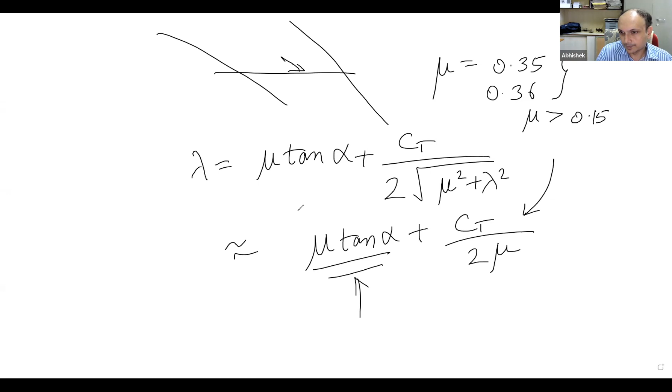Yes sir, and the figure of merit is, we can assume one, right? I know it's defined. No, figure of merit is not even defined for forward flight. Figure of merit is only defined for hovering flight. It has no meaning in forward flight.

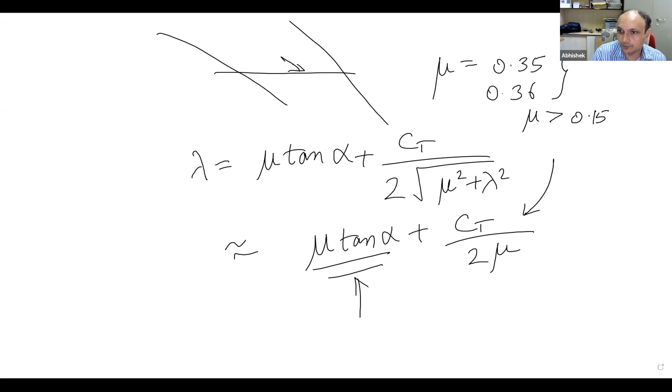And all those calculations by doing everything numerically without requiring to use any formula. You will not be using any formula for anything. All the calculations will be done by numerical integration. So how do we do numerical integration? You will have two options. One is you can do this rectangular method or trapezoidal method, or the other method will be Gaussian quadrature.

Gaussian quadrature, exactly, yes. So we'll do Gaussian quadrature, and I'm going to tell you what is Gaussian quadrature now, because some of you may not be familiar with that. So the main topic now we are going to study is actually applying blade element theory in forward flight, and then deriving the blade flap dynamics equation, and then solving the whole trim problem. So we'll do all that one by one, but before that we need to do this for the next homework assignment, so take down all this carefully.

In Gaussian quadrature, what do we do in this? Gaussian quadrature actually allows you to express any definite integral of this form as a summation series. So a definite continuous integral of this kind is expressed as a series summation. So what is this? This is summation of i equals 1 to m of wi into the function f at xi's. So if m equals 3, this will be w1 f(x1), w2 f(x2), w3 f(x3), etc.

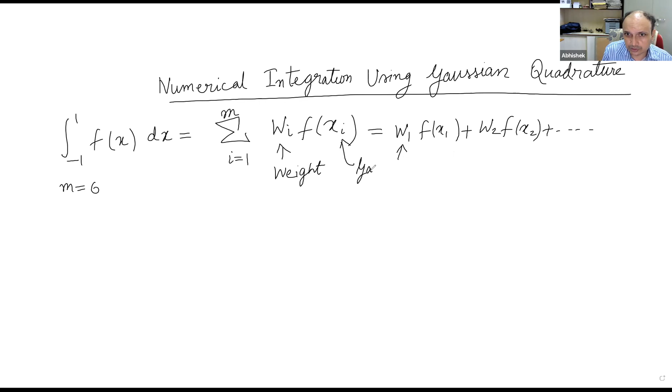So these are actually weights. This wi is actually a weight, like a weightage factor. And xi is, so what is happening now? In the summation series, we are multiplying some weightage factor with the value of the function at xi, or different Gaussian points. This is called a Gaussian point. What are these Gaussian points?

There are nice proper mathematical approaches. If you do any course on numerical analysis or computational methods, you may get a chance to learn about Legendre polynomials and many other things, and Gaussian quadratures also come as one particular thing in that. So one can easily derive these things and find out these weights, but you don't have to do it now. It's already done for you.

So we'll use 6-point Gaussian quadrature. So we'll have 6 xi's and 6 w's. What are these and how do they look like? So x1 and x6 are both going to have the same magnitude but different signs, so it will be minus and plus. Minus sign is for 1 and plus sign is for 6, hence minus plus and not plus minus. The value is 0.932469514.

And you have to note it down up to all these decimal places to ensure accuracy. So 0.932469514. Okay, so these are 2 points. Your x1 will be minus of this, x6 will be plus of this.

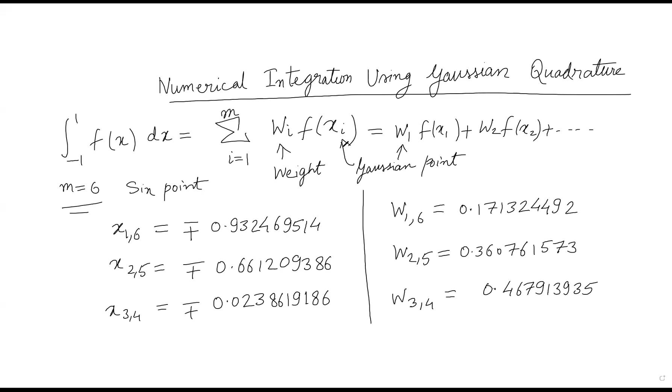Sir, the summation of the weights is approximately 2. Is it okay, sir? Summation of the weights is equal to, I don't care whatever they are - these are what the weights are. Okay, so I'm erasing this. Fine. No resistance, so gone. All right.

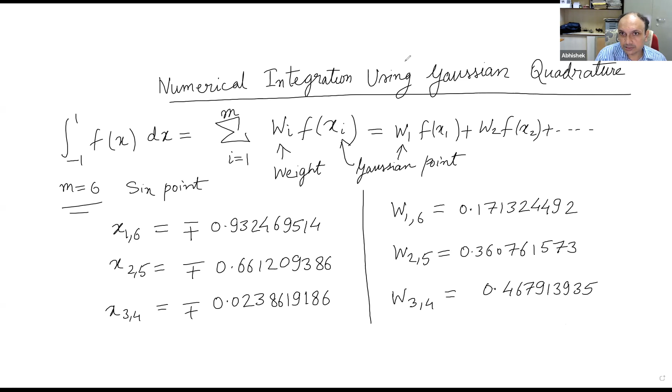But now the problem is that the integral that Gaussian quadrature is helping me solve is this. But I actually want to solve a different integral, right? Which is there for my BEMT. So my BEMT, all my equations go like this: 0 to 1 of dCt equals to 0 to 1.

It could be half sigma CL alpha into theta minus phi into r square dr or something, right? I'm just writing from my memory or something like this. So this becomes my thrust equation. I want to solve this integral, or I want to do the integral for my power, Cp or Cq, whatever. So there is a difference, right? This is a different limit, this is a different limit.

So how do we apply Gaussian quadrature formula for this guy? What do we do?

So this is dCt. If you look at the expression for dCt integration, it is like an even function, so we can divide it by 2 and put the -1 to 1. I cannot rely on that completely - it may not be an even function because CL alpha is also not constant, and this is a complicated function. R square dr - r square dr is fine.

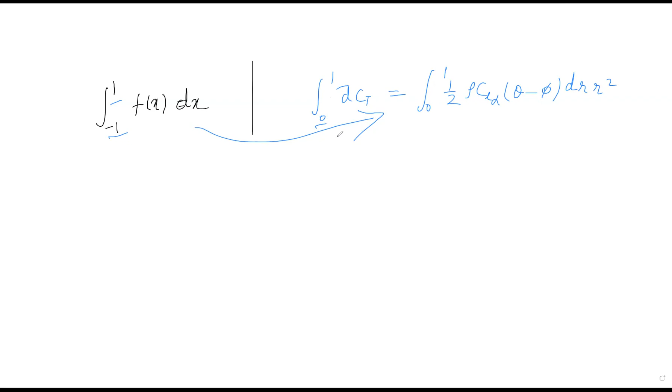I don't think you can say that 0 to 1 is actually, I mean, 0 to half will be same as half to 1. No, sir, I'm not saying that. Sir, in integration, we have a rule that if -1 to 1 integration f of x dx, if f of x is an even function, then we can take 2 into 0 to 1 f of x dx. That is true, but there is no guarantee this function is an even function.

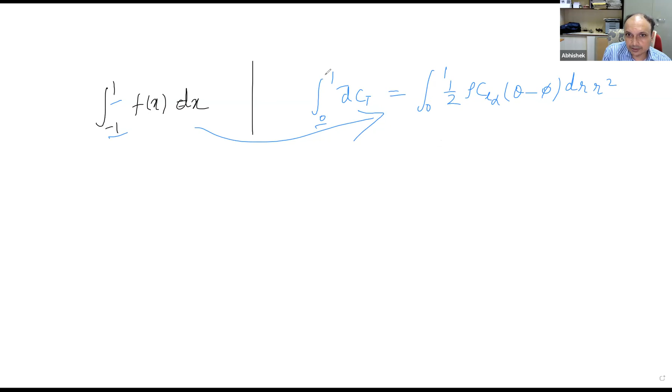So what will normally be done? Forget about even and odd functions. What would be a more general approach? If I want to change my limits of integration, what do you do? Sir, we can take a different variable. Yes, change of variable. So that is called change of variable, right?

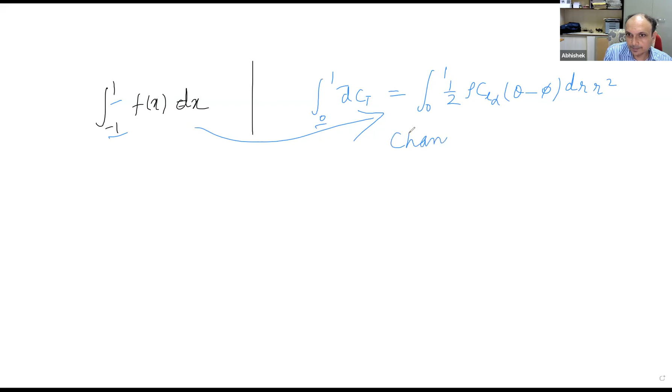Yes, sir, that's all we have to do. So we do a change of variable to convert this equation to this form, so that I can directly go around solving my relevant equations. So what do we do? We try to derive this for a generic scenario where my integration is from a to b, f of t dt. So this is the integral I want to be solved. So what do you say? t equals to ax plus b.

So this is my new function t, which is a function of x, and I need to find what are these a and b, which will allow me to change the variable from -1 to 1 to this sum, any a or b, which could be 0, 1, or it could be anything.

Once you see the homework assignment, you will see that we are not going to do the integral from 0 to 1 in one shot using 6 points. We will break the whole blade into multiple segments. So for each segment, it goes from 0 to delta 1, then delta 1 to delta 2. You start from the root, take one segment, then another, then a third, and so on. I'll break the whole integral into many different segments for the blade.

That's why I will derive it in this form. So a will be equal to minus A plus B. When x is -1, t is a, and when x is +1, t is b, so it becomes a plus b. These two allow me to find capital B equal to small a plus b by 2, and capital A equal to b minus a by 2.

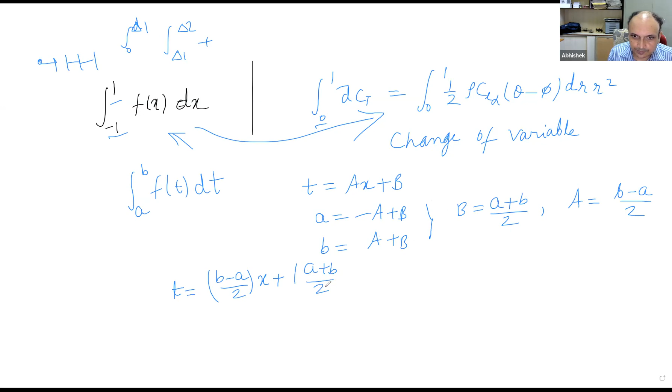So these two now allow me to do a changeover. My new function becomes this, and from this my t is now equal to b minus a by 2 times x plus a plus b by 2, and dt equals b minus a by 2 into dx. So that allows me to do a complete change of variable.

So now my Gaussian quadrature integral can be rewritten in this form. As per Gaussian quadrature, integral from a to b of f(t) dt equals sigma i equals 1 to m, where m equals 6 for us, of Wi, so the weights will not change, but we'll have f of ti instead of f of x. So what is ti? Ti is actually this. So whatever x values we had earlier, those same points will have to be put into this to find T1, T2, T3, T4, T5, T6.

That's where you will do the function evaluations. And this, because there is dx also which is converted to dt, I will also have a b minus a by 2 multiplied to this whole thing. Where ti is defined as b minus a by 2 into xi plus a plus b over 2. So that becomes my ti, and this is the integration.

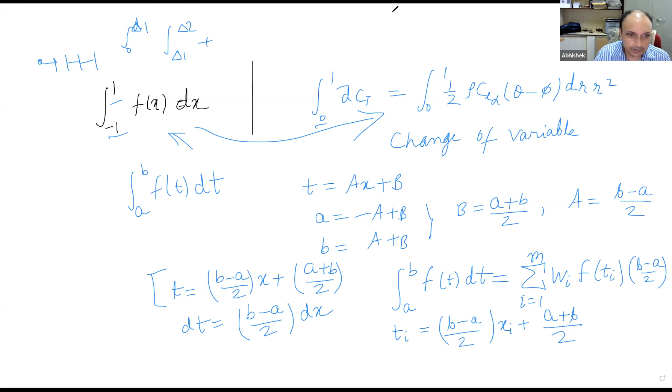So now using all of this, what are you supposed to do? Let me erase, then I write up. Finally, with this, I actually need to solve these equations, these two integrals, and that is your work in the homework assignment. Half 0 to 1 sigma, and now you are doing things numerically, so you can keep everything inside the integral. It becomes a very generic thing, because your solidity will be changing. You will have variable chord and all in the homework assignment. So keep sigma inside: theta r square minus lambda into r into dr.

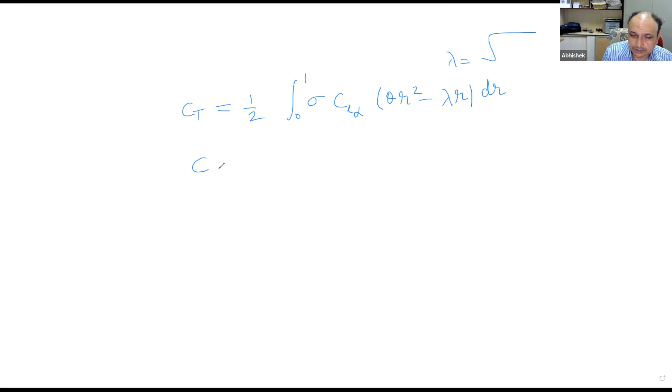And lambda is your BEMT formula. Lambda will be that square root of something, there is a big formula, right? That will be the BEMT, blade element momentum theory formula used for lambda. So this is the integral you have to solve using either Gaussian quadrature, or you can use any other method like trapezoidal or rectangular. But in rectangular and trapezoidal, you may have to use a large number of points, around 200.

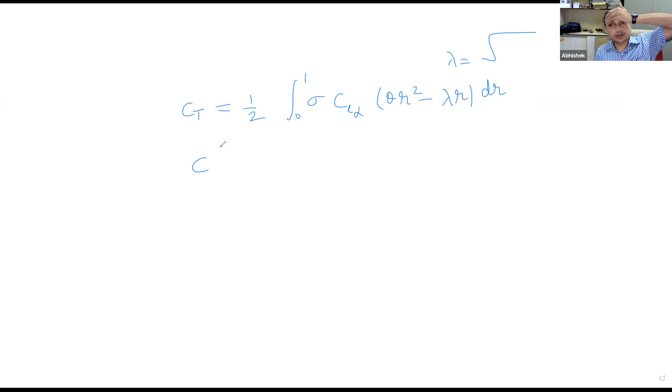So rectangular, Leishman used to make me use 200 points in my homework assignment. But in Gaussian quadrature, it is more accurate. So just break the whole blade into 10 segments. 10 segments means your integral goes from 0 to 0.1, plus 0.1 to 0.2, etc., going up to 0.9 to 1. So you will have a loop which runs on the number of blade segments, and each segment will have Gaussian quadrature with 6 points.

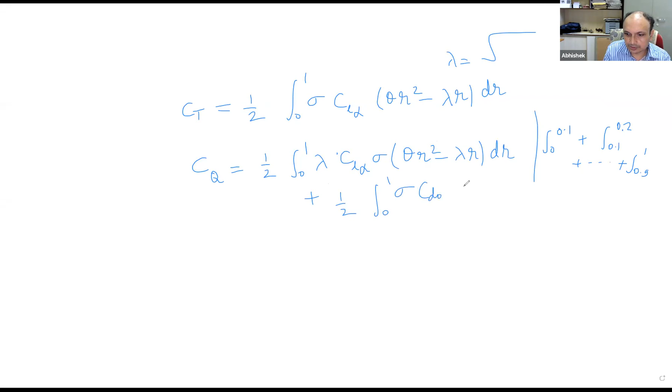And so you keep doing each integral and add them over to get the whole integral done. The other expression is half integral from 0 to 1 of lambda CL alpha sigma into theta r squared minus lambda r, dr, plus half integral from 0 to 1 of sigma CD naught r cubed dr. So these are the two main integrals that we have to solve.

So I prefer all of you use Gaussian quadrature, but if you find it difficult, you can use any other method. But you should get accurate answers.

So Gaussian quadrature is fairly easy to implement. I don't think you'll have much difficulty. Before you directly jump to solve the whole problem, if you want to learn how to use Gaussian quadrature, solve a simple integral. Write a small MATLAB code where you try to do the integral from 0 to 1 of x squared dx, because you know the answer to this is actually going to be 1 by 3, right? So you know the exact answer. So now you do 6-point Gaussian quadrature on this.

Then you can even break it down and do the integral from 0 to 0.1 plus 0.1 to 0.2, going all the way up to 0.9 to 1. Do the same integral. So you can write a simple MATLAB code before you write the full BEMT code, where you practice how to implement Gaussian quadrature, and you will see it is very easy for this kind of problem. Once you have written this, you can make it a function, and keep doing integrals as much as you want.

So in this case, first you can do just 0 to 1 using only 6 points. Next, you split the whole thing into multiple segments and use 6 points within each, so it may become 60 points, but it's a code, so it will be very easy. Check the answers, right? Once you are confident you know how to implement Gaussian quadrature, then you write the remaining code. I mean, you have all formulas given to you, so it will not take much time. Once you have the Gaussian quadrature working, the rest is just a matter of typing. So it's fairly easy.

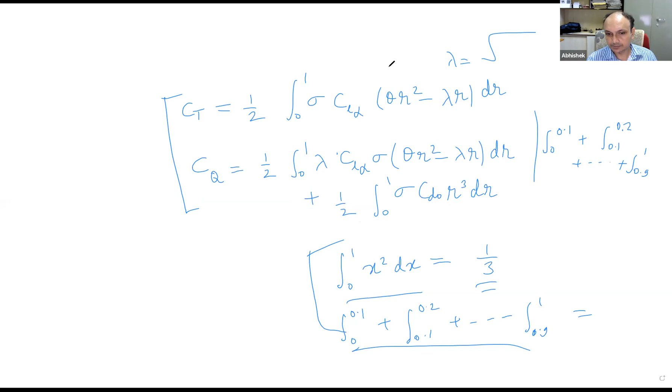All right, so that was the deal about the Gaussian quadrature business, which you can use to solve the next homework assignment. Now I will go back to sharing my notes on how do we apply blade element method in forward flight.

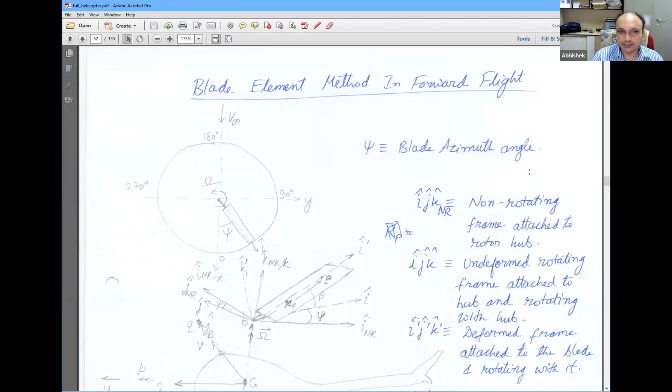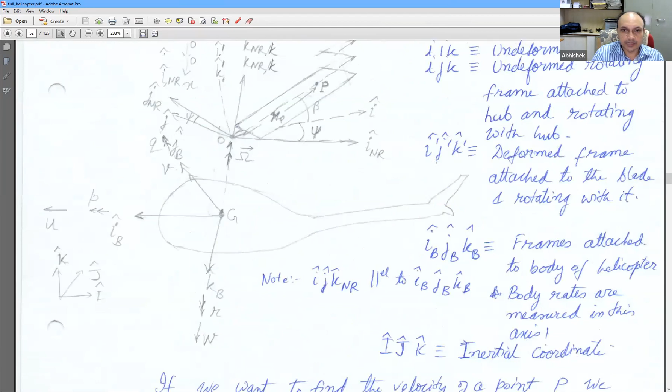So you need to draw this equation, this diagram. Maybe I can draw on the sides as well to give you an idea how to go about it.

So the topic is blade element method in forward flight. That is, how do we do blade element in forward flight condition? And this blade element theory in forward flight is sort of the building block of all kinds of helicopter analysis. So unless you are doing CFD, everything else in the helicopter world, whether flight mechanics, stability analysis, the helicopter trim problem, or developing a controller, anything and everything would probably require you to do some kind of blade element method. So this is very, very important.

This is, like I mentioned, the building block of more accurate and more physically consistent simulation for helicopters. So how do we start? Step 1 is you draw this diagram of a rotor in forward flight.

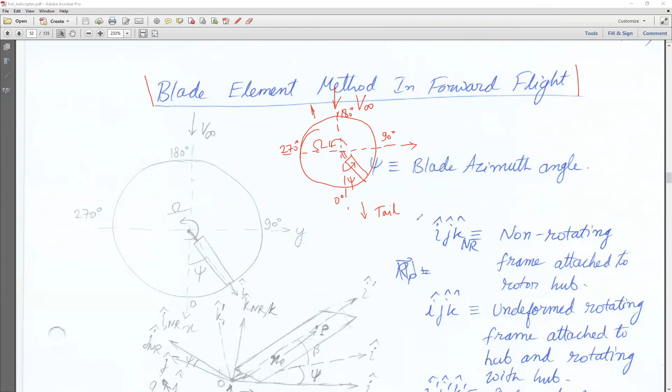How many of you are doing the dynamics course right now? Use the raise of hands function. How many are doing the dynamics class, or have you done the dynamics class? So 4, 5, not many people are. Others who are not doing dynamics, have you ever done dynamics, especially transforming from one coordinate to another? In your undergrad, all of you would have done some dynamics, right? Sajendra, which department are you in? Mechanical people are taught dynamics left, right, and center, with machine design and rotor dynamics courses typically. You did not do any course on rigid body dynamics? You should ask for your money back from the college where you studied, that they made you a mechanical engineer without training you in rigid body dynamics. That is a very scary situation. Anyway, I'm not going to teach you the whole dynamics, but you can take a look at what we have. Sajendra, are you a student of aero department or mechanical department? Right now you must be doing a mechanical dynamics course, right? Right now I don't have any dynamics course, sir, we only have introductory courses of aero. So you are in which group? I am 21 batch, sir. So you are in fluid thermal, in Aerodynamics. You are in aero department, right? I asked if you are from mechanical or from aerospace, currently which department you are enrolled in. My BTech is from mechanical, sir, but right now I am in aerodynamics. Okay, fine, so I am surprised why you took the helicopter course. It's complicated and challenging, sir, in comparison to fixed wing. Yes, that is true, that is absolutely true. I thought you would have compulsory courses and no room to do this, but anyway, somehow you managed.

So the point I was trying to make is that we now look carefully at a lot of coordinate frames, and we would actually be transforming things from one frame to another. Why? Because if you look at the helicopter rotor, even though I said blade element method in forward flight, what I am going to derive now is actually a blade element method in any general or maneuvering flight. So I'll erase this diagram, it's not just forward flight, I am setting up the stage for general flight conditions, which will allow you to analyze the helicopter in any kind of flight condition. But you will have to move systematically by setting up the problem in a nice manner.

Because right now when we look at the angle of attack alpha, I simply say my angle of attack is theta minus phi, and phi is UP by UT. And this is lambda into R, or lambda by R, whatever. Lambda is again UP, or I can just keep it as lambda. So it's something like this, right? This I know very clearly, I know what is UP, what is UT, and so on.

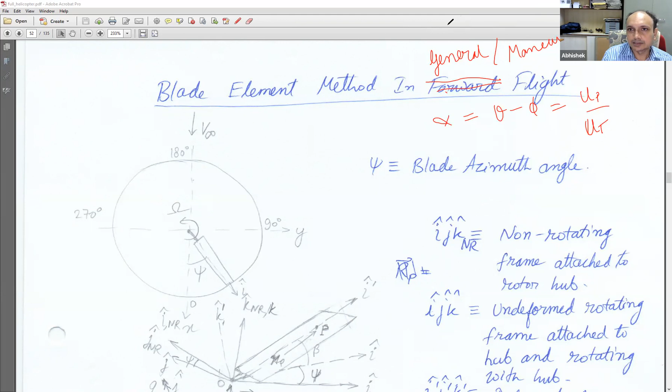But when my helicopter is actually in a very general scenario, it could be rolling, it could also be pitching, so it could be doing a banked rolling pull-up, it could be doing a rolling pull-up, or it could be a rolling dive.

So in such scenarios, what happens? The resultant velocity which the blade element experiences would be a function of many things like P, Q, R, that is the motions of the helicopter. P will be your roll rate, pitch rate, yaw rate. So these rates, then my helicopter may also be moving in 3D, that is, we'll have 3 components of velocity about XYZ axis, so UVW.

So all these are going to combine together and make the resultant airspeed here not very easy to write just like that. So you have to do proper vector algebra and follow the standard approaches or methods that we use for kinematics, that is geometry of motion. So let us see what all we need for this kind of analysis.

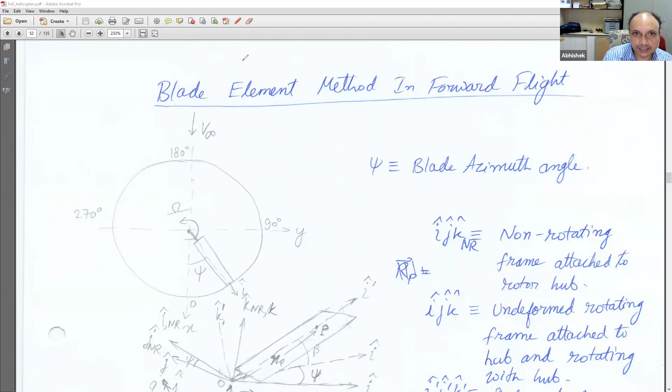So we start by defining several coordinate frames and let us look at them carefully. First, when we look at the top view of the rotor, we have this blade and we attach one frame here, which will be going out of the plane of the board. That frame would be K hat, and we call this non-rotating.

Then we have I hat. Luckily, I think these diagrams are too close to each other, so it is slightly confusing to see what is from where. I think in the top one, just let me grab the picture.

All right, so what we do is we define multiple frames of references. We start by defining this frame of reference called IJK non-rotating. This is called non-rotating frame attached to the rotor hub.

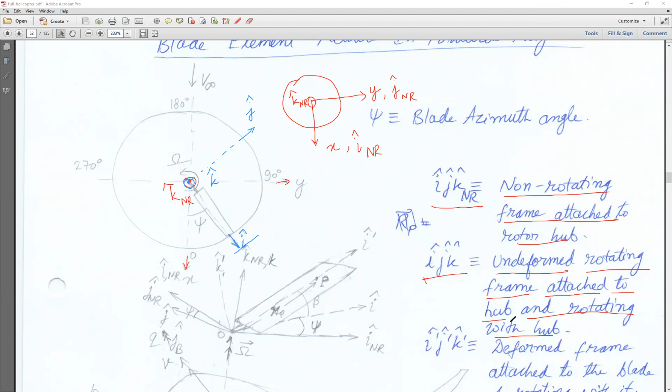Position and velocity, you are saying you define... I mean, here we have roll, pitch, and yaw motions in different frame of reference. That's why. No, roll, pitch, and yaw are always in the same frame of reference - that is the body frame of reference. We'll come to that frame also. Yeah, so but the velocities, I mean V, W, those are in different frame of reference.

We are right, so exactly, you are getting there almost. So what Parth is saying is that my helicopter, when it's flying, the velocities are actually defined with respect to an inertial frame, right? Because I say, okay, I'm going at 5 meters per second - that is with respect to some inertial frame. Although in reality there is nothing called an inertial frame, but to make our lives easier, we say any frame of reference attached to the fixed ground or any fixed point on Earth is actually a fixed frame of reference.

So what I was saying is that your translational velocities are normally defined in the inertial frame. Your rotational speeds like P, Q, R are defined in the body frame. So the key philosophy behind defining multiple frames of reference is to make your life easier when there are multiple rotations happening. It is very easy for us to visualize and understand rigid body rotation about one axis.

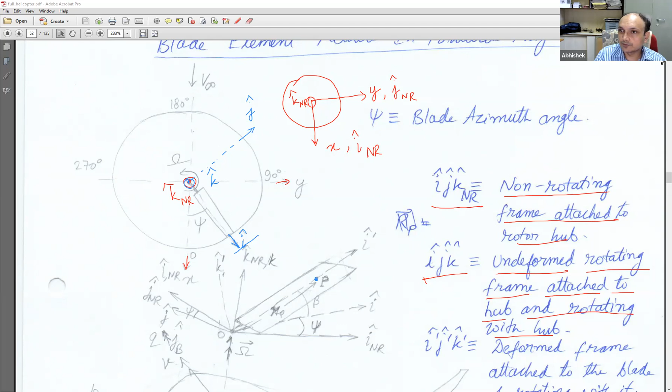So you can imagine, I'll ask you to find the velocity that point P will be experiencing because of all these motions. What are the motions? Blade rotation, blade flapping motion. There could also be lead lag. There could also be twisting motion. Right now I'm not even talking about that. Then there is the helicopter's UVW and the helicopter's PQR. So many translations and rotations happening, and finding P will become very, very challenging. And that's why we define so many different frames.

All right, so now we have so far looked at two frames. First frame is the non-rotating frame attached to the hub, aligned like this: X pointing towards the tail of the helicopter, Y pointing to the left. Sorry, right—this is the starboard side. You are familiar with this term, starboard?

Port? Yes, sir. Yes, sir. All of you?

So this actually comes from naval engineering or ship engineering terminology, because they used to call the left side the port. The ship will always have port on the left and starboard on the right. So in airplane terminology also we use this sometimes.

So Y is on the starboard side, X is towards the tail, and Z is vertically upwards. The second frame is the undeformed rotating frame attached to the hub and rotating with the hub. So now you can see that the I, J, K will have an angular velocity of omega, as you see. And this omega is actually omega K hat, or omega K hat non-rotating—both of them are the same.

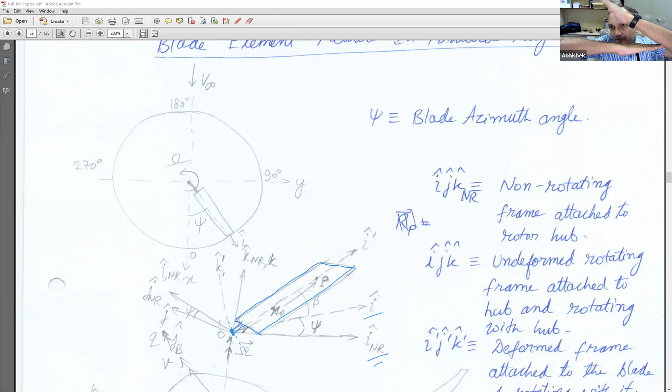So now at this point I define another frame of reference coming out of the blade, and that is this particular frame—I'll make the color purple. So this is the new frame, I hat prime, and normal to that will be this guy, J hat prime.

So this line you see is normal to the blade, and this guy is actually—sorry, this is not correct. Yeah, it should be J hat prime. Where is my J hat prime? Okay, it's a bit confusing. So J hat prime is this, sorry. Yeah, it's hard to represent 2D things and 3D things in the same frame, but I hope you will be able to understand.

So what happens: I is there, then there will be a J, and there will be a J prime also. Both of them are in the plane, but I can ignore them—they are in the plane, but now what I want is the J prime, right? So J prime will be normal. My blade is like this, so J prime will be normal to the blade, in this direction—the blade is flapped up. So this is denoted by this guy, J prime is here.

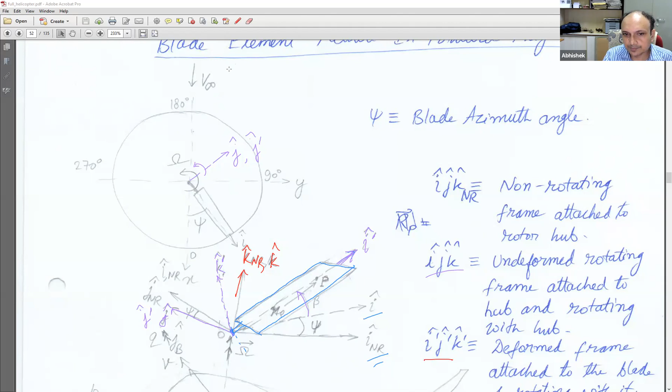Now we have considered a third frame also. This is called I hat prime, J hat prime, K hat prime - it's called the deformed frame, attached to the blade and rotating with the blade. So we have the non-rotating frame, then the rotating but not deformed frame, and now the deformed and rotating frame. In every step I am accounting for one angle: from here to here I account for psi, one rotation; from here to here I account for another angle beta. So by here, I have accounted for two rotations easily. That's my third frame.

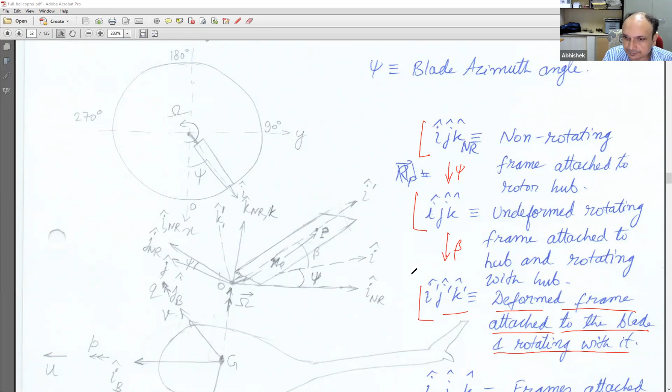The fourth frame now comes at the helicopter. So the helicopter body will have different frames of reference. One is pointing downwards - I'll go to another color - one is pointing downwards, which is my KB, the vertical body frame. This is IB, JB, KB, the frame attached to the body of the helicopter, and the body rates of the helicopter are measured in this particular axis.

So my P, Q, and R - the roll rate, pitch rate, and yaw rate - are all measured in the body reference frame or body-fixed axis. This is attached to the center of gravity G of the helicopter, and down is the vertical K. This is going to be the right side, the starboard side, which is JB, and towards the nose of the helicopter I have IB. So these are the three body frames: I, J, K.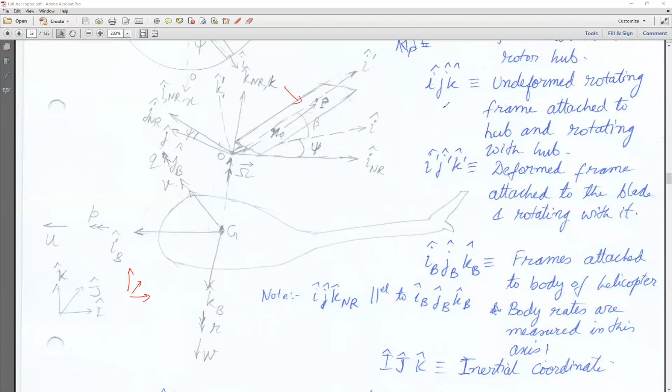So depending on what we are doing, sometimes, if I'm trying to solve the flight dynamics equation, especially translational equation, you are solving Newton's equation, sigma f equal to ma. So when we do flight dynamics, we solve Newton and Euler equations, Newton's equation for translation and Euler's equation for rotations. So for that, inertial coordinates may be useful.

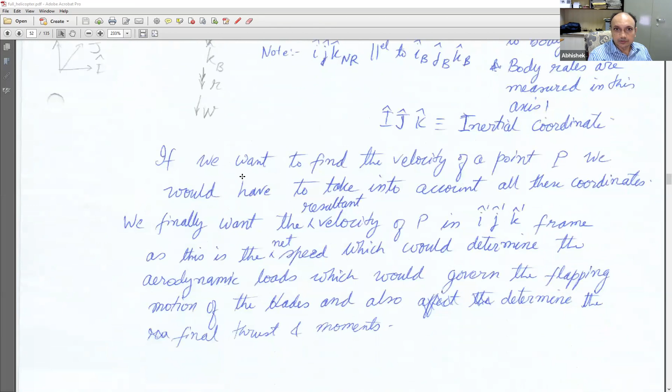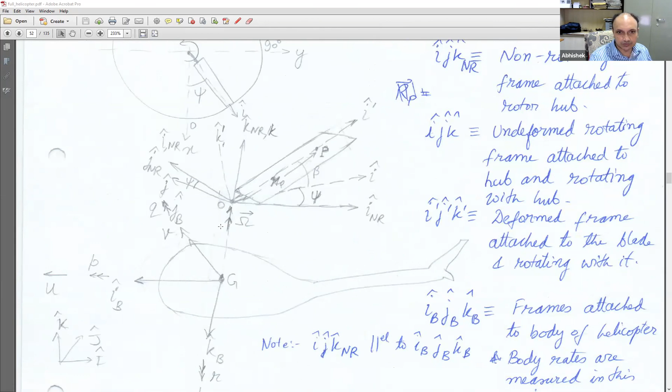All right, so let's move. Our objective is to find the velocity of a point P, which we have marked here on the blade, some arbitrary point located at a distance Rp from the hub. To make our lives easy, we have assumed the blade is hinged directly at the axis of rotation, where omega is the angular velocity. So we want to find the velocity of this point P in the I hat, J hat, K hat prime frame, as this is the net speed which would determine the aerodynamic loads, which would govern the flapping motion of the blade and also determine the final thrust and moments.

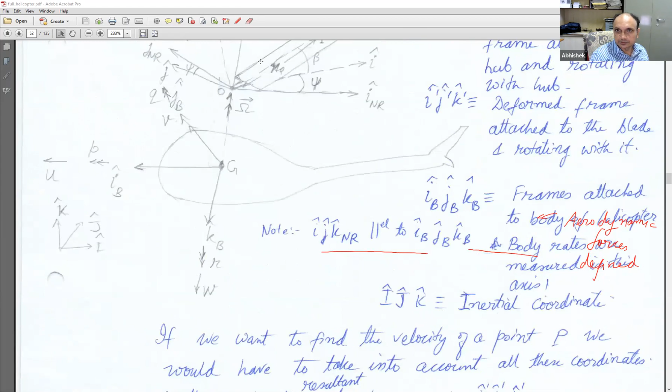So my key objective is to find out the velocity of air as experienced by a particular point P on the blade, which is on some blade element, because we are doing blade element theory in a general maneuvering flight condition. So we try to find everything in this frame because my aerodynamic forces are defined about this deformed frame of reference, Ijk prime - this deformed frame attached to the blade and rotating with it. Okay, so let's move ahead and see how do we go about doing this.

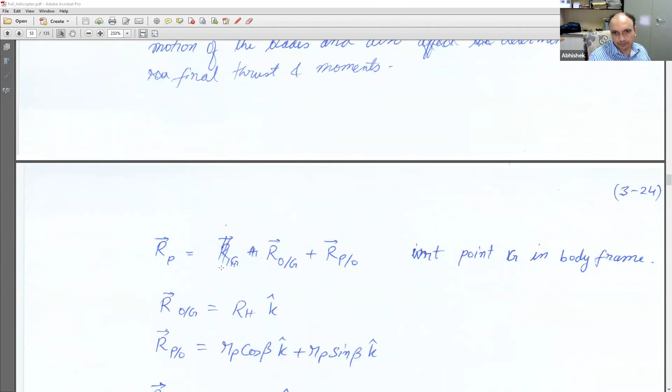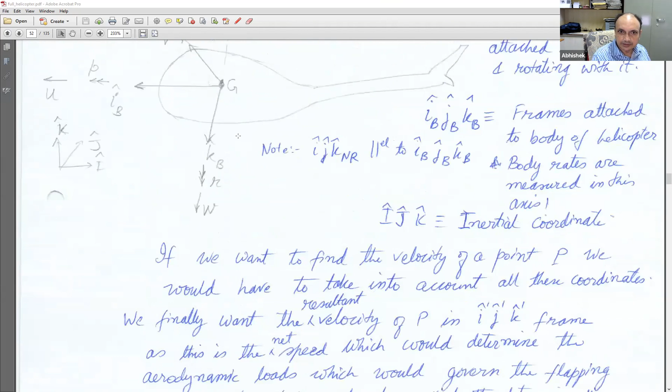So we start by writing out the position vector of the point P in the body frame. So there are some other points which are marked, O and G. G is the center of gravity, you can mark that. And another point O, which I forgot to mention, O is the center of the hub and G is the center of gravity.

So if I want to find the velocity of point P in the body frame, then I need to find the velocity of O related to the point G and velocity of point P related to the point O. So the relative velocities can be added and it will give you the net speed. And that's what we'll see.

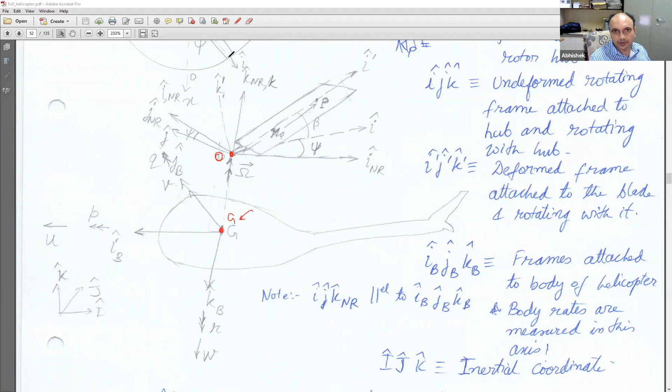Position of point P on blade is given by position vector of point O, which is the hub center, related to the center of gravity, plus relative location of point P with respect to the point O. So I am defining it into two parts, that is...

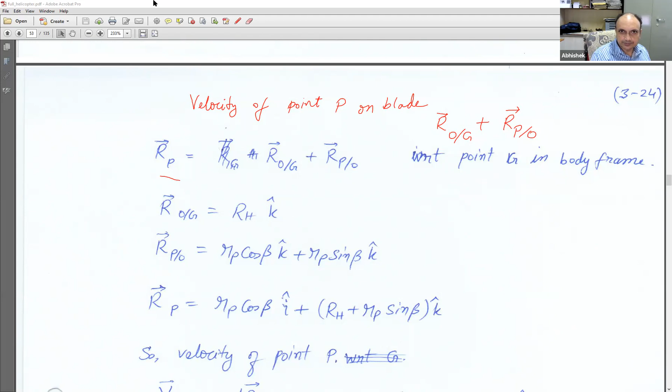Okay, so we are saying, oh, this point I want to find out. So I have one vector going from here to here, another vector going from here to here. So the resultant then will be something like this. So the resultant position vector goes from here to here. So this vector I am trying to find by going from here to O and from O to P. That is my objective.

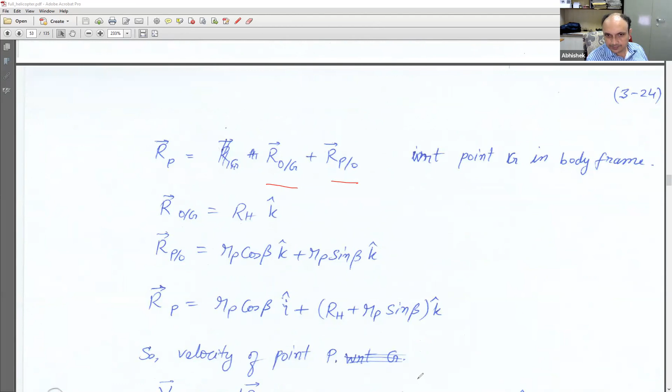So that gives me this RP equals to ROG and RPO. But I think we are already out of time, so I'll stop here because there's no point of proceeding further, because we have to start from here again. So I'll stop. Any questions so far?

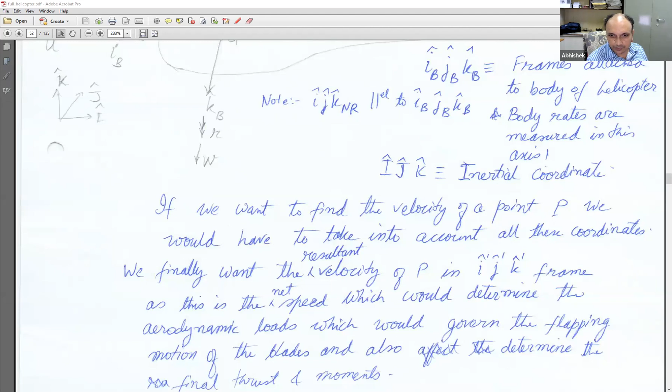Anybody else wants to share your experiences of your midterm exam?

Hello. Yes, sir. Sir, I have equated lambda from momentum theory and blade element theory, and I have solved it by using Newton-Raphson method to find the tip speed. So I've got some answers, so I was not sure that it is. How can you get tip speed by finding lambda? No, sir, I have not found lambda. I have equated the lambda of momentum theory and BET theory, blade element theory, and I got in terms of omega r and VH. So VH I was knowing, so I found that VH and I got omega r using Newton-Raphson method. No, but where do you know the VH from? There is no VH given to you.

Sir, I've calculated VH. I have done my assignment, so I will mail it to you.

I'll grade your exam and see what you have done, then we can discuss it. I thought I had given enough hints for everybody to figure out, and that's why I told very clearly, make cheat sheets.

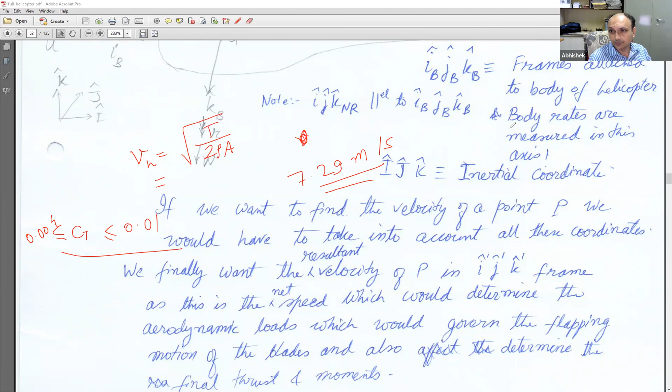Sir, can we have another meeting for discussion on this midterm paper exam? Sure, we can have that, or you guys can solve it yourselves if there's a point for whole class discussion. If you have specific questions, otherwise solve it yourself - you should be able to, because now you know the trick, so it is very easy and straightforward to solve.

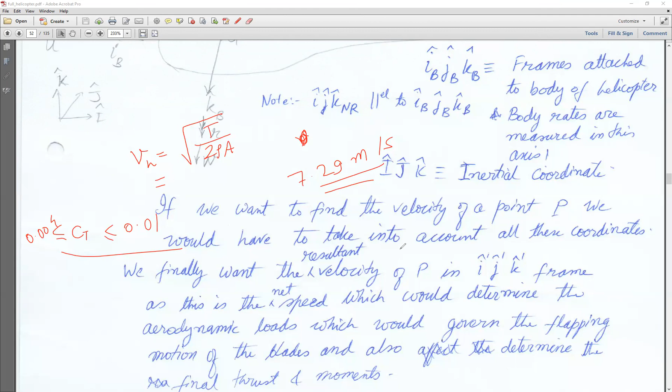The trick was only to use the hint. I had given you theta 0.75 for a reason. There was theta TW also, but theta 0.75 was given and theta TW is not used. I have used theta 0.75, and I mentioned it in that particular manner so that you directly use a simple formula, you don't even require theta TW.

BET, direct BET, not BEMT. BET with uniform inflow, BEMT is never used in hand calculations. Simple funda: you can only solve BEMT by writing a code, which you are doing in the next homework assignment. So you cannot do any closed form derivations using BEMT. Just remember that.

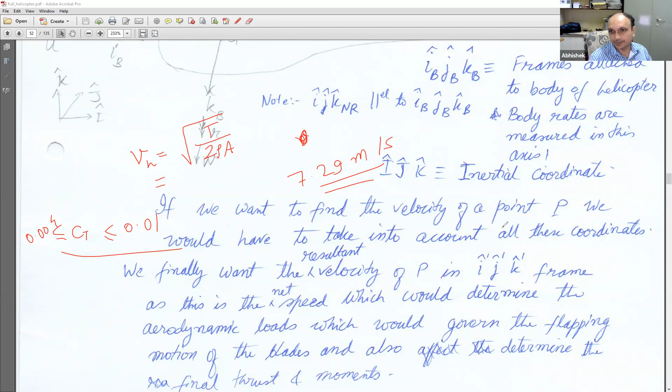Sir, what if in the first question, instead of hover, you gave forward flight? We wouldn't have been able to solve it, right sir? Because in the first question you have to find CT. And in the second one, when we want to find the tip velocity, in hover the quadratic equation can be easily solved by putting lambda equal to root of CT by 2. But if it was given forward flight, it would have been very complicated.

Could it have been solved with pen and paper, sir? That's why I've given you a question which has to be solved by pen and paper. Can we solve it with pen and paper, or do we need MATLAB only? With some approximation, you can even solve it with pen and paper.

So you have to apply the right kind of approximations at the right points. The question paper was set up in a manner for you to be able to think clearly. This course is all about teaching you how to apply your knowledge. It doesn't require you to memorize things, because at such an advanced level we actually cannot do anything by memorizing. There is no point in remembering formulas and doing things.